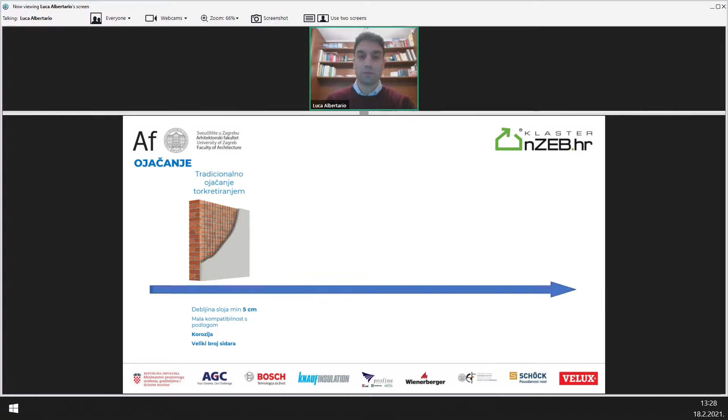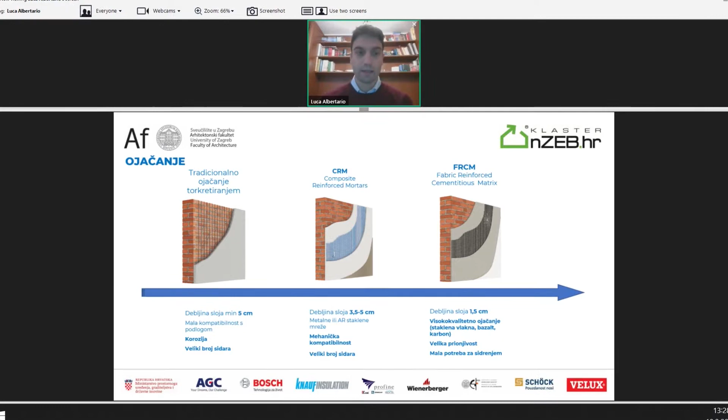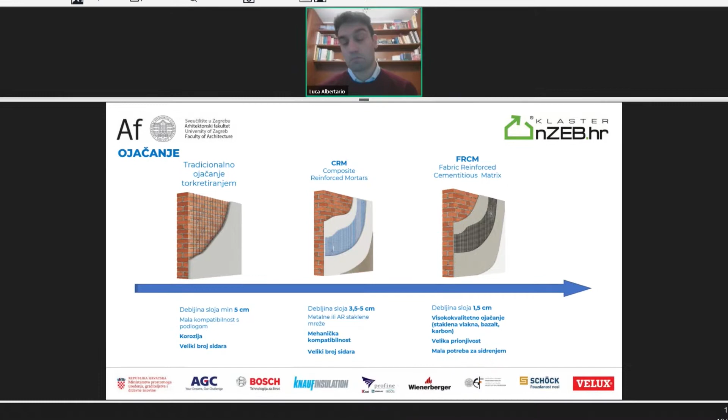Today I will resume what Marco, my colleague, explained before my presentation, and I will talk about the difference between the main systems we can propose for structural strengthening of masonry, starting from the most traditional one, the structural render made by steel mesh and traditional cementitious mortar, compared to more innovative solutions with more advantages, like the CRM or FRCM systems.

To summarize, the main difference is very high in terms of capacity, stiffness, and compatibility with the substrate, because the main topic here is the compatibility between masonry with a very low elasticity modulus and a traditional system made by steel mesh and mortar with much higher stiffness.

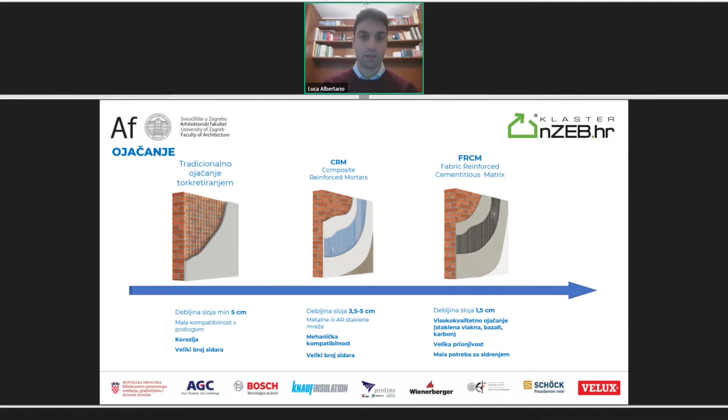So in the past in Italy we had some very bad experiences with that traditional system because of its stiffness and low compatibility with the substrate. In my presentation I will show you some examples of that bad application and some results of that problem.

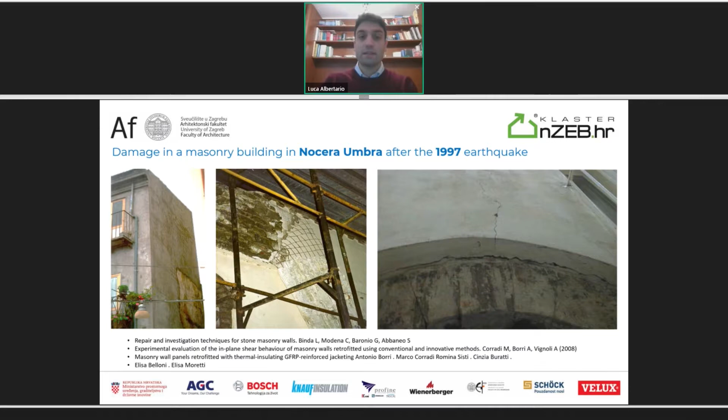In these few references, you can see, beyond a scientific point of view, the main problems related to this traditional technique applied on masonry. This picture was taken after the earthquake of 1997, a very old earthquake in Italy, and we can still see the bad effects of such intervention on the masonry structure. That's the reason why in the following years we developed other solutions.

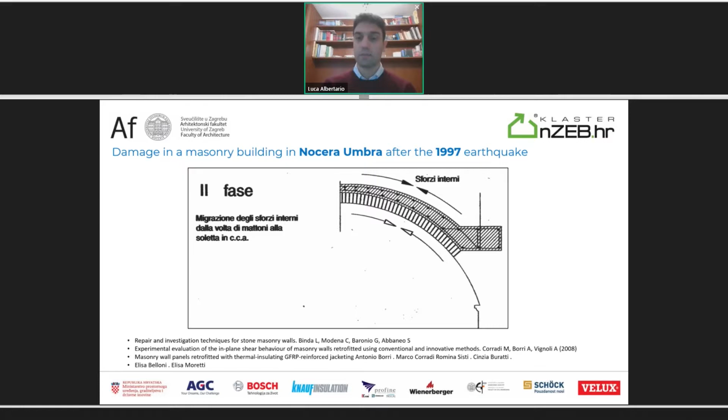Another very important case is the application of this traditional system on masonry vaults. In that case it's even worse, because as you can see in this picture, in the past in Italy we realized a lot of concrete reinforcement on existing vaults, called Calotta in CA. But the problem is that we are unloading the existing masonry vaults, and it can cause a loss of compression in the arches or masonry vaults, which is a very bad situation.

Nowadays we have other systems that can increase the tensile capacity of such vaults without changing their stiffness and without causing such problems.

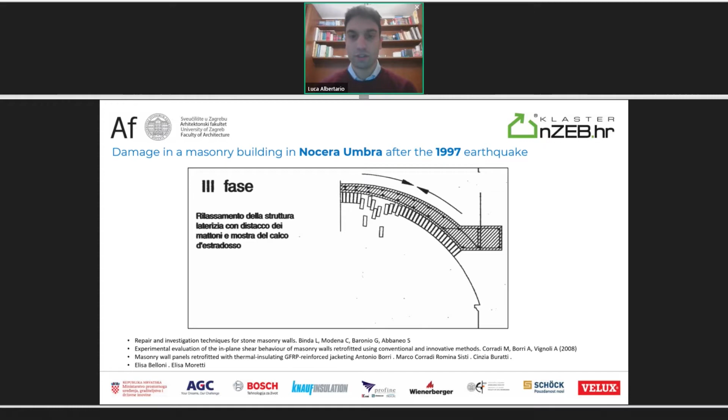As you know, in Italy, like in Croatia, we have a very strong and long history of seismic retrofitting. MAPEI's first and main application in Italy was in 1997 after the earthquake in Assisi, where there was a great collapse of the vaults of the Basilica di San Francesco d'Assisi.

That was the first application of FRP system on masonry vaults. In this picture you can see the application of this system, carried out by MAPEI in order to strengthen the masonry vaults.

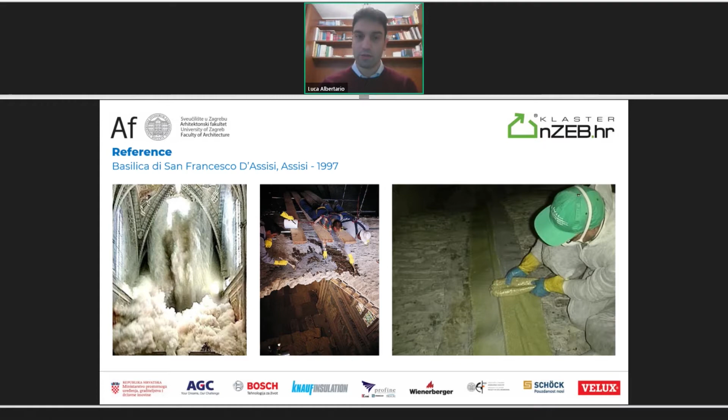But as you can imagine, the techniques have been optimized over these latest years, passing from FRP application - fabric plus epoxy resin - to other systems like FRCM, so glass or basalt fiber meshes in combination with mortar, as Marco explained before. Like in this case.

More or less 10 years ago, another very important earthquake took place in Italy, in Reggio Emilia, and in that case we applied systems like FRCM, which we can see in this picture, on vaults.

After good substrate preparation, making injections along the cracks of the vaults, we applied a glass fiber mesh with a very low application thickness, about 1.5 centimeters. The mesh is very flexible, able to follow the shape of the vaults easily, and compared to a traditional concrete solution, the weight of the intervention is much lower. This is very important because it lets us avoid the collapse and loss of compression on the vaults while increasing their tensile capacity.

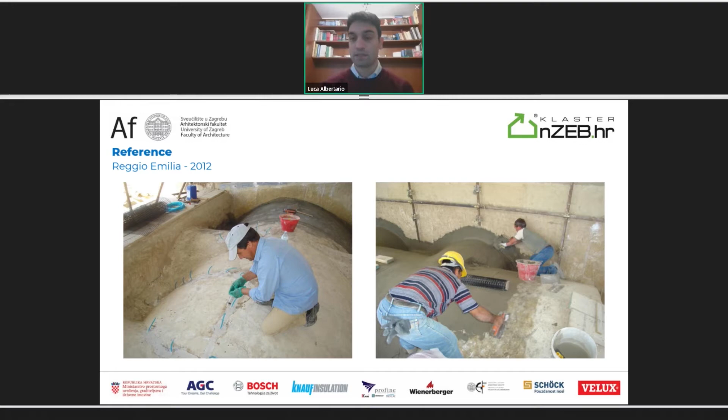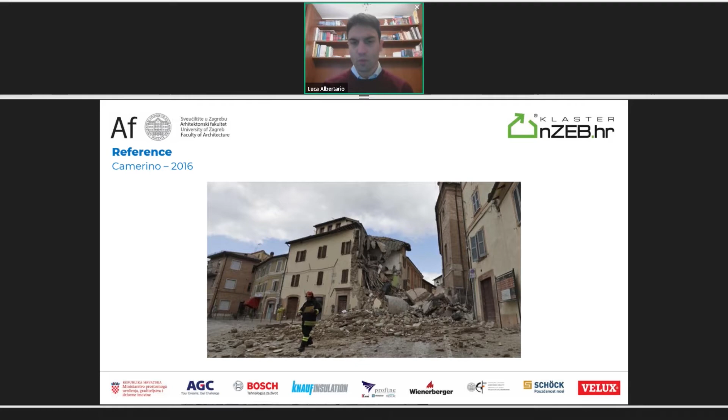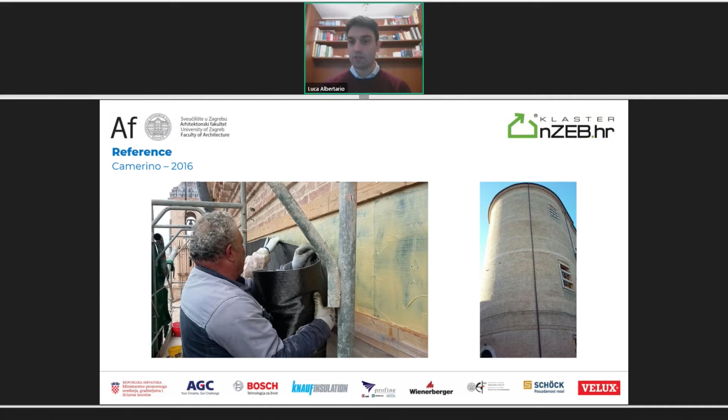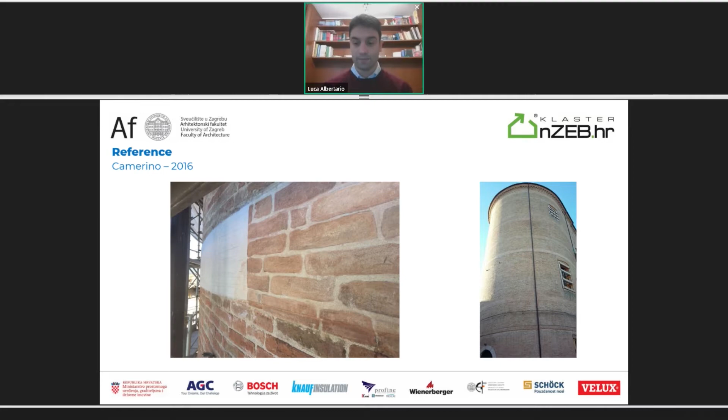On the right side, you can see the final results of the intervention, pretty invisible due to the application of a specific low thickness render on the FRP that could totally hide the intervention. In the picture on the left, you can see the application of such low thickness render painted like traditional masonry, so it's super well hidden beside the application.

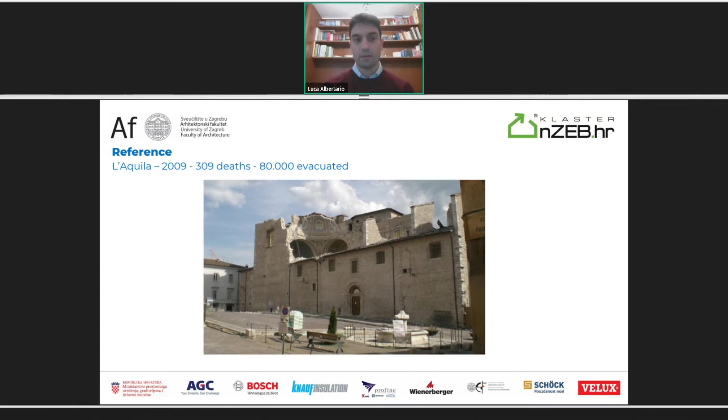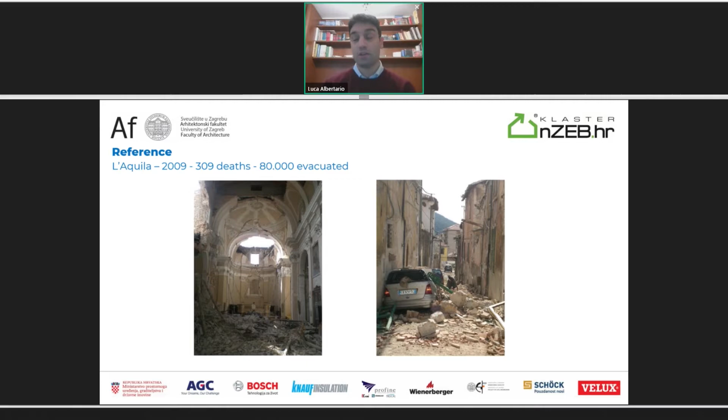Another very important experience we had in the past is in L'Aquila in 2009, with a lot of deaths and evacuated people. After that we gained huge experience with new and innovative solutions like FRCM and FRP. This is L'Aquila nowadays, so we are still working on reconstruction, even if a lot of work has been done. Most of the strengthening work has been carried out using glass fiber or basalt fiber mesh instead of steel, because nowadays in Italy it's clear to everybody that traditional solutions could cause a lot of trouble.

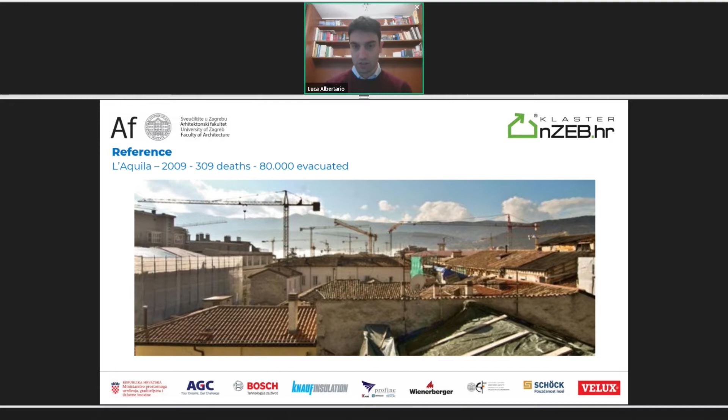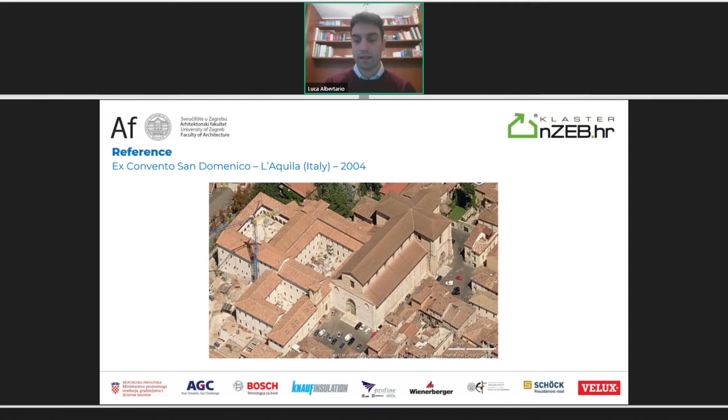Moreover, compared with these new and easy applications - just to share our experience, we carried out strengthening jobs before that huge earthquake. We're talking about the ex-convento San Domenico in L'Aquila, where we did some interventions few years before the earthquake, like injection and strengthening of vaults, and that's the results.

This picture was taken after the earthquake in L'Aquila of 2009. As you can see, we are sure about the results that such techniques could produce, since we have experience of application before real and very important earthquakes like in L'Aquila.

After that earthquake, as I told you before, the FRCM and CRM solutions became super widespread, so that kind of application is very common in a lot of cases. In L'Aquila was probably the first massive intervention for FRCM. It was the first place where such application became very, super widely used.

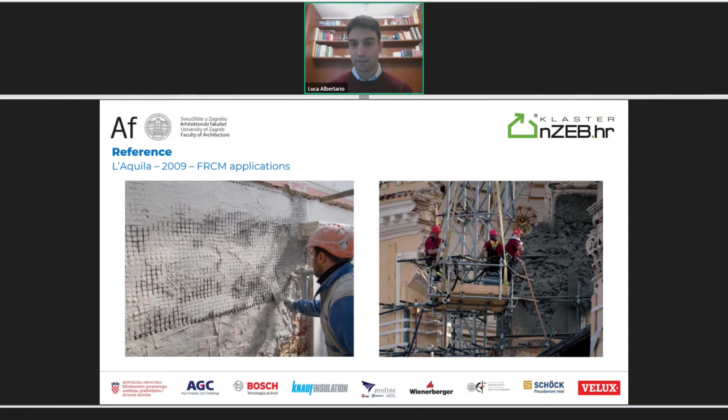In those pictures you can see, on the left side, some application of the FRCM system, and on the right we have a lot of experience applying such mortar on strongly damaged structures, where the firemen were working on it few hours or days after the earthquake, in order to protect the masonry. But our experience is not only in Italy.

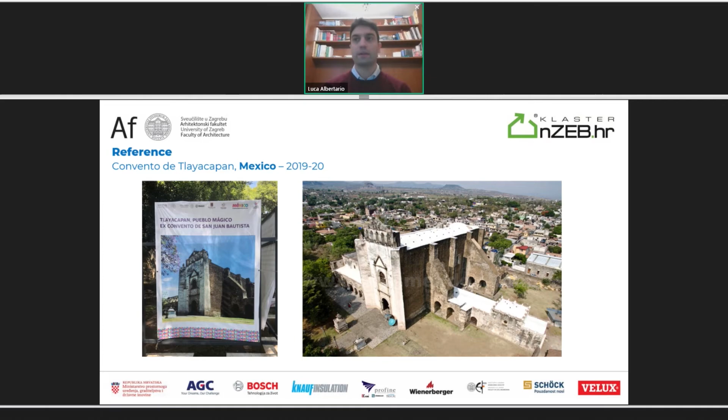We have a lot of experience worldwide. For your information, this is another application of FRCM system that we did very recently in Mexico, in some very historical churches, like the Convento de Tlayacapan in Mexico last year, after the earthquake of 2017. In this picture, you can see the application of our FRCM system connected by using the fioccos.

These are some real tests on the vaults. After that huge earthquake caused a lot of trouble on that structure, a new earthquake unfortunately took place last year. But we can say the structure had a very good behavior after the intervention. So we have the test, and also an experience of a new earthquake on a freshly strengthened structure using the FRCM system.

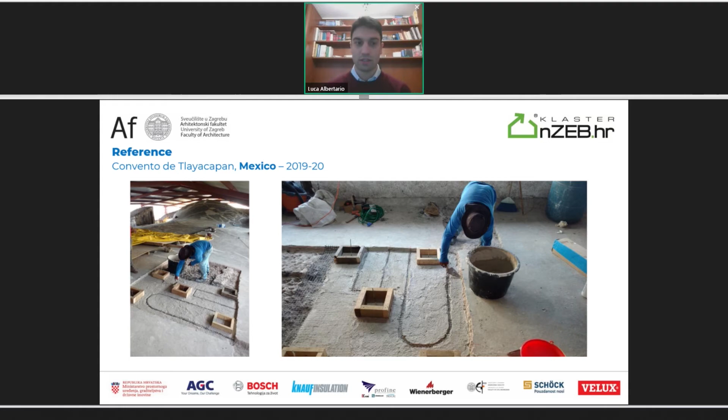Just another case to show you some of our experience - we are working in Colombia, for instance, and a lot of other countries where we are still applying this system. Originally, the starting design required steel mesh with traditional mortar, but as soon as we showed them the results of such intervention and our experience and all the advantages - the engineering and practical advantages of such a solution - they switched the project, they changed it to using this kind of solution.

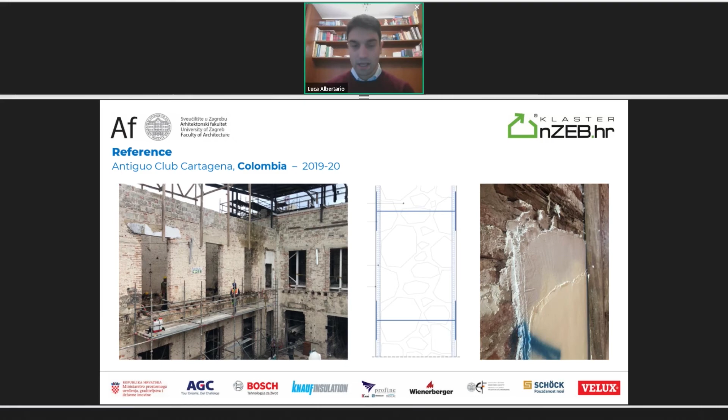Obviously, before all these applications, MAPEI during the last 20 years carried out a huge and very impressive experimental campaign. In most cases, after that experimental campaign, new standards have been developed. So today the standard situation is very clear. In Italy we have guidelines for the calculation and for the certification as well, even if it is very new. So we are waiting for the final certification of such a system, even though all the tests have been carried out in the past.

Just for your information, this is some of our experience from that experimental campaign point of view. On the left side you can see a sample of masonry rebuilt in the lab and tested with different systems, in order to study and get information about the results we could achieve using these different techniques. On the right picture, you can see another test on the portal.

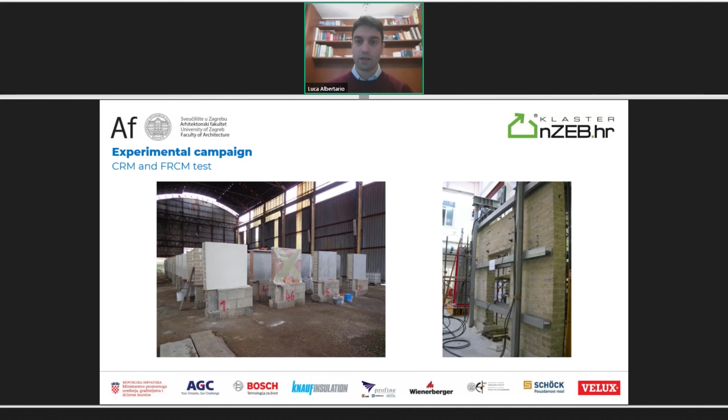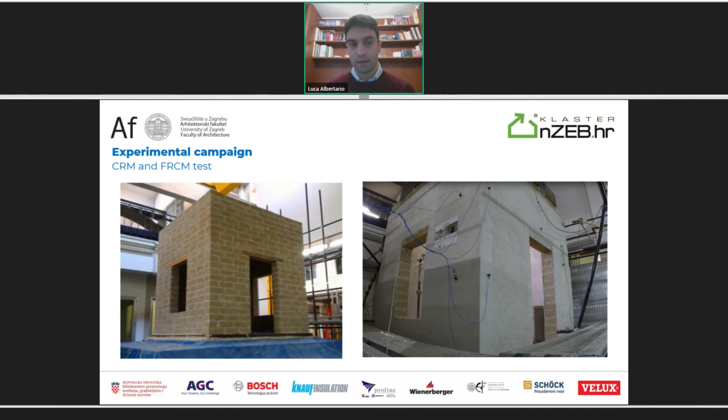Okay, so we have a lot of experience on that. We did tests on a shaking table machine as well, on rebuilt masonry. So we have very wide experience on that. We did a lot of tests on masonry vaults.

So honestly, I could say that this kind of technique - FRCM, CRM, etc. - cannot be defined as innovative, because we have been applying this solution for several years, with a lot of experience on site, besides from a standard point of view, certification point of view, and experimentally. So we are sure about the goodness of this solution, even more compared to the traditional one.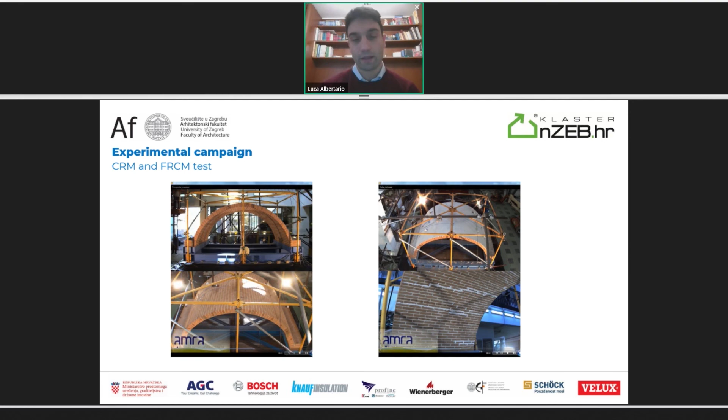I hope to have been clear, and I hope that I respected the timing of my presentation. But in any case, we remain at your disposal in order to provide you any further information about all our systems.